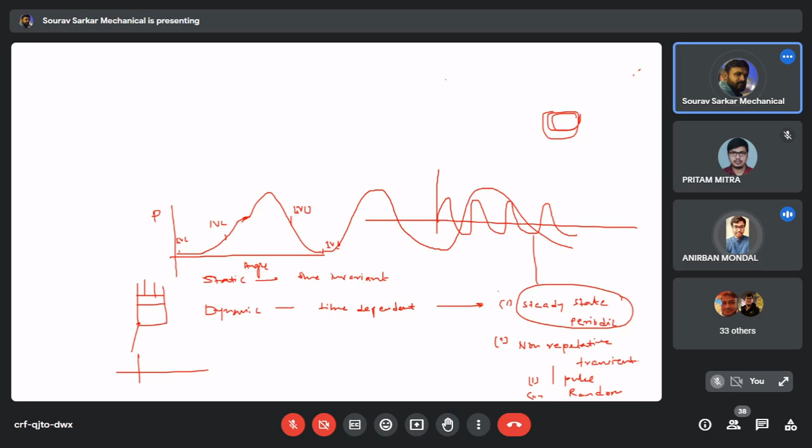Any doubt up to this point? If not, I am trying to say what is the main funda of dynamic characteristics. The main feature is that, if I give an example, suppose this is our environment, and this environment temperature is suppose 30 degrees Celsius.

Or maybe if you have done that thermocouple calibration experiment where the inside temperature was 370 degrees Celsius, and this is the gate or window through which you are inserting the thermocouple. Initially the thermocouple is at environment temperature 30 degrees Celsius. Whenever you are giving 370 degrees Celsius as the input signal, and whenever your system was at 30 degrees Celsius, it will take some time to reach this 370 degrees Celsius.

So what is this called? It can be called a time delay. What is the reason behind this time delay? The thermocouple is absorbing heat for some time, because temperature will rise due to absorbing heat, and only then can it attain this reset after some time. So gradually it will absorb heat, and it will take some time to attain that temperature, only then you can say it is basically taking this time.

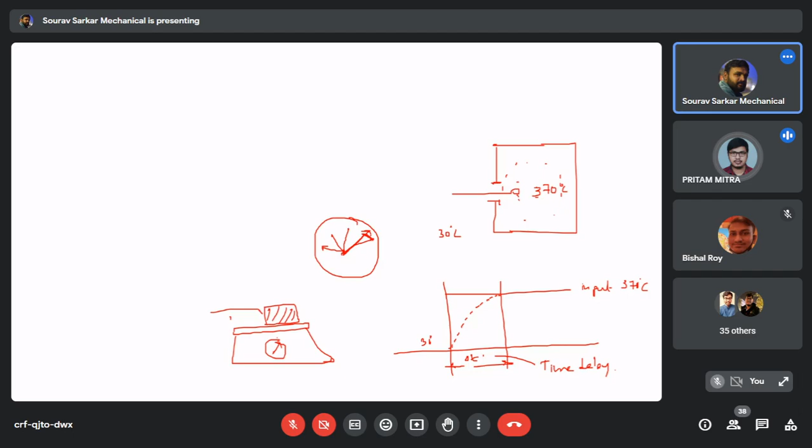Have you observed that? Yes, sir. Has anyone seen that? Yes, like this? You've seen this, right? Whenever you are applying the load, it oscillates here, there is a dancing, right, before coming back to the steady state, there is a dancing.

So if I try to plot the data - another important thing I want to mention is that whenever you are measuring any instrument, you have something called QI and something called QO. What is QI? Input, the measurement you need to measure. And what is Q out, QO?

That's a result. The parameter that's related to the measurement, the one being measured - exactly. QO is the parameter which is related to that measurement. So if your measurement changes, your QO will change, and you will get a calibration between QI and QO, and finally you will tell what is the exact value, right?

I want to say specifically, if there is a spring balance machine, your QI is actually the weight of the object, and that will cause an X naught. So your QI is basically the weight, and QO is equal to the displacement.

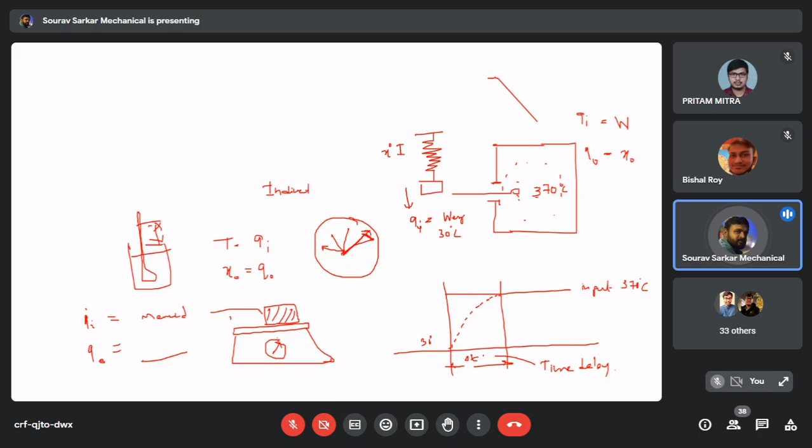So I am trying to say, if you see any measurement instrument, if it is an indirect type measurement system, there will always be an input which is QI, and there will be a Q out. So if I talk about temperature, the length is my Q out. If I talk about pressure, what is my Q output? The angle deflection - angle, theta. Yes, theta. So these are the outputs and these are the inputs.

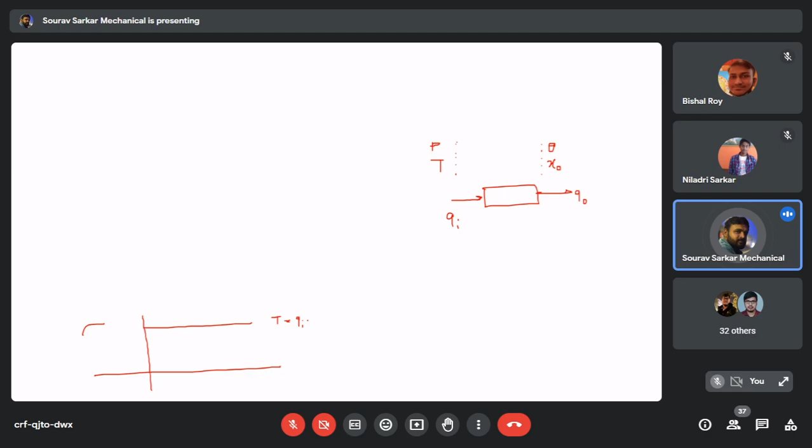Now what I'm trying to say is that if you give an input temperature which is QI, say 370 degrees, it doesn't mean that your output will suddenly attain this 370. So the behavior of input and behavior of output may not be exactly coincident, right?

If you have a weighing machine and you add a weight, this is the input - you are putting one weight over the weighing machine. Your system response will look like this. Do you accept this? Yes sir. So if you have a weighing machine, this is basically the QO and that is the QI. So my question is, why is this difference happening? What is the reason behind this difference? Why is your output not exactly behaving like your input?

So disturbance may be there. Disturbance - if there is no disturbance, maybe that's the same as attaining the steady state, attending the system. But I'm trying to say that you are getting this behavior, right? So my question is, who is responsible for this behavior?

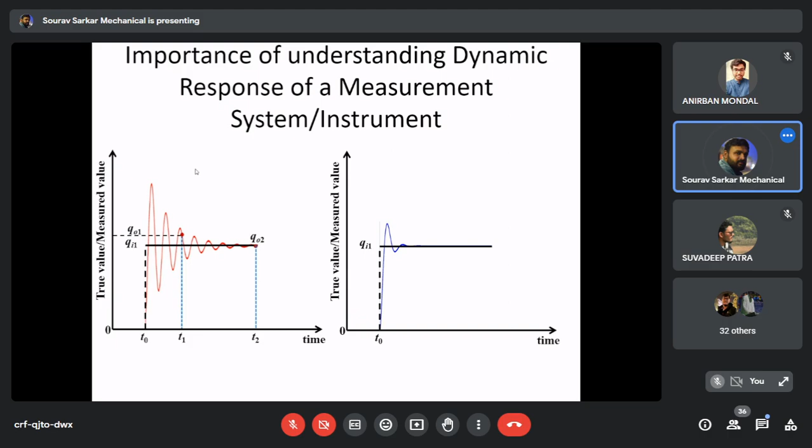Now it may happen that you have designed an instrument so that it quickly comes to the steady state value. So it is also important for your design, which component, if you think about this spring balance, what value I take for k, what value I take for the damping coefficient, so that my system behaves like the second system, so it can easily reach the steady state value.

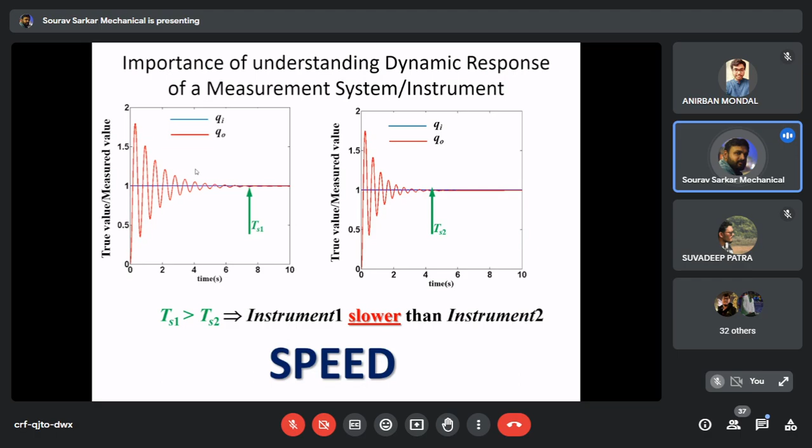So now I am a designer, thinking in the perspective of a designer, right? So this is qi and qo, and this is the settling time t, and the settling time can vary based on the system configuration. So I can say that instrument 1 is basically a slower instrument, and instrument 2 is a faster instrument. So I can also characterize speed from the instrument, how fast it can give me a true result.

Similarly, there can be a system. If you see curve 2, figure 2, the system never attains the value of the input even if you wait for an infinite time. So this is called the steady state error.

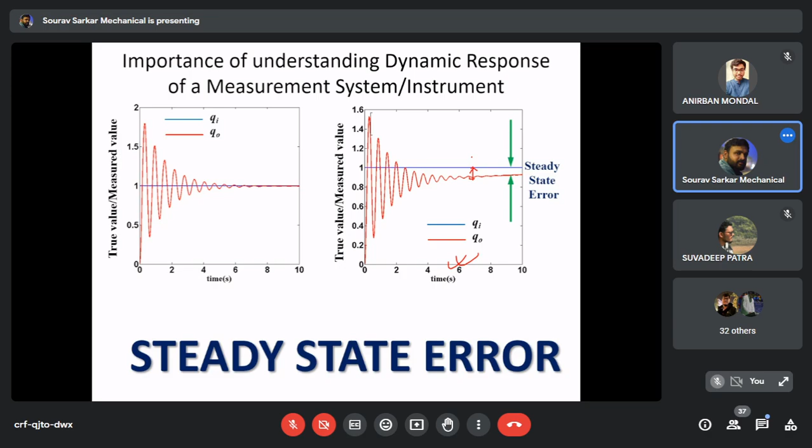So your system behavior will also decide whether there will be a steady state error or not. And this is the overshoot. So you have one instrument giving a behavior like this. But if you are tweaking the components and modifying the system, it can also give a behavior like this. This is more desirable than the other behavior.

So you have to understand why the system is behaving like this. What are the parameters that decide the system will behave like this? Or if I have the opportunity to tune the parameters, what are the parameters that need to be tuned so that the system behaves like this?

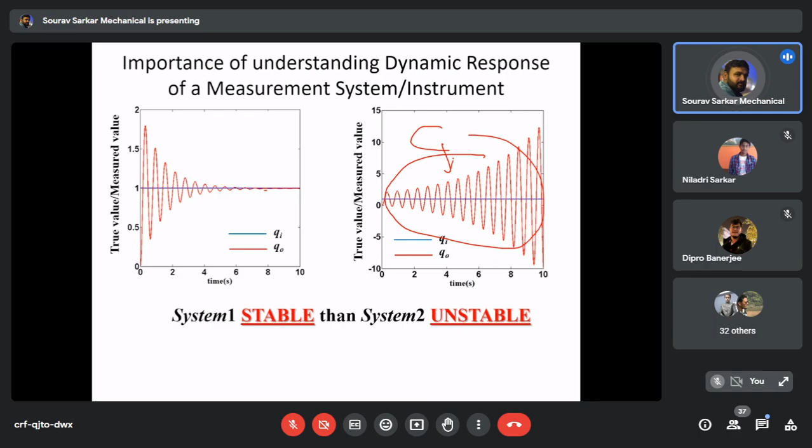Now to summarize and conclude the previous 10-15 minutes: we have to know the input and output relationship considering the specific need of the application. So we have to model it. I have to know the input and output mathematical equation. Then only can I see the behavior. And if I know the behavior, then only can I change the parameters and try to control the behavior. So the solution of the derived differential equation uses a standard procedure.

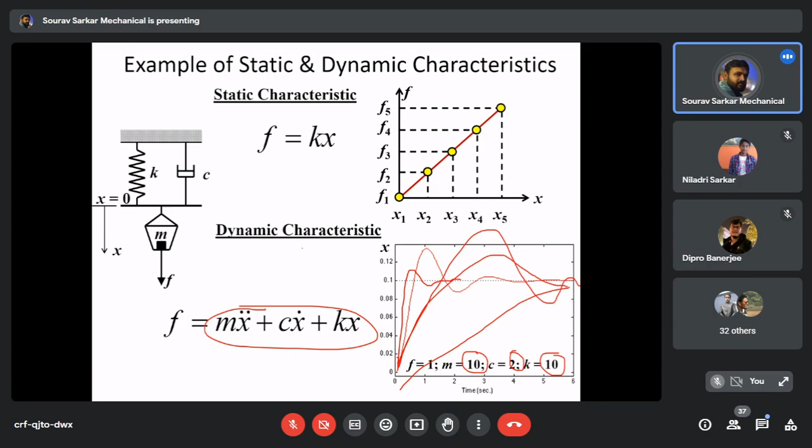So extraction of dynamic characteristic features from the time dependent relationship between input and output. Control the system parameters to achieve the desired dynamic features. Then use the dynamic characteristics in measurement to correct errors or filter improper data.

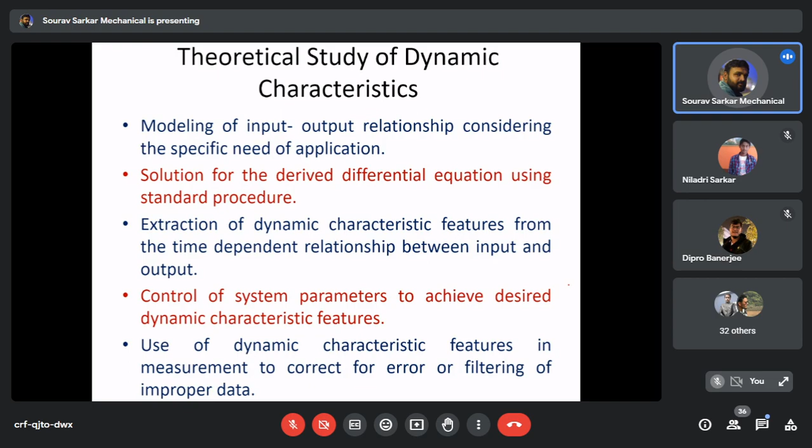So if I know the dynamic characteristic features, then I can take some measures, like please do not take a reading within 30 seconds. Like your doctor prescribes that if you are inserting your thermometer in your mouth or under the arm, they suggest you wait at least 30 seconds or maybe a minute, because the doctor knows the system behavior. So if you simply touch it, it will not give you the correct result because of the system behavior.

So already these things are known to you. I told you in the first class that in this whole course we are not going to learn something new. We are trying to collect concepts from different places, and based on that we are going to create a generalized perspective which is applicable everywhere. You have done almost 20-30 experiments in different labs, in different sessionals. Now you are trying to accumulate all those individual experimental ideas, and based on that you are developing a philosophy of experiment.

Hopefully you understood, right? Any doubt? Yes sir, so now I understand that there is a measurement system, and if you give one input, it will give you some output, and this is the input-output relationship, and it will look like this.

So we know that the behavior of any system generally follows a differential equation, and differential equations are things that we understood very little. Whenever I see a differential equation, my thermometer reading starts to go up, right? I'll try to make this very simple so you can easily understand that the dynamical behavior of a system can be expressed by an ordinary differential equation or maybe a partial differential equation.

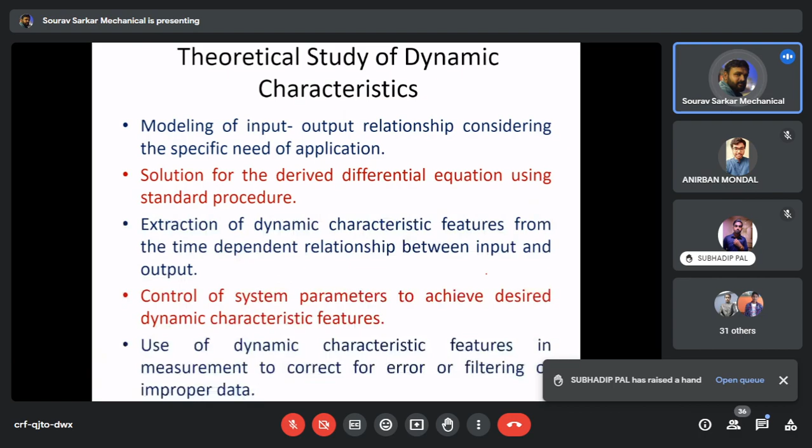তাহলে ফাইনালি কি দাঁড়াচ্ছে? আমার সিস্টেমের বিহেভিয়ারকে প্রেডিক্ট করতে হবে। এই সিস্টেমের বিহেভিয়ারকে প্রেডিক্ট করার জন্য ডিফারেনশিয়াল ইকুয়েশন দরকার। সেই ডিফারেনশিয়াল ইকুয়েশন অর্ডিনারি হতে পারে, পার্শিয়াল হতে পারে, কিন্তু আমাদের এই সাবজেক্টের scope only focuses on the ordinary differential equation।

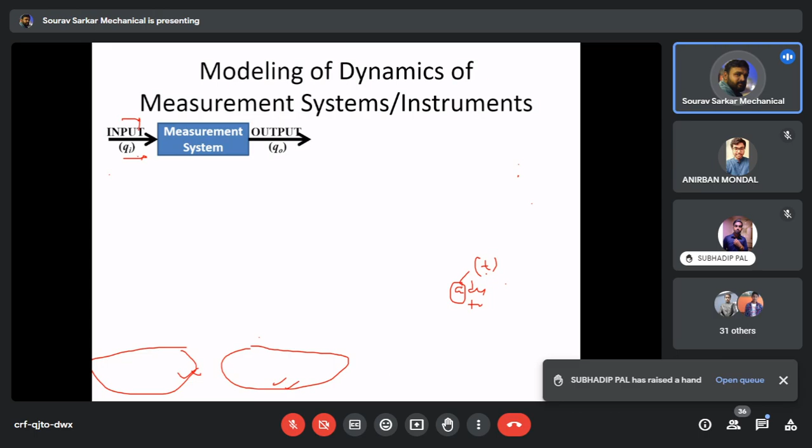But the ordinary differential is also a very big domain. There can be linear and non-linear. In our course, this UG3 mechanical measurement instrumentation UG level course, this only focuses on the linear ordinary differential equation. But linear ordinary differential is also a little bit a wide topic. We try to make it more simple for undergraduate students.

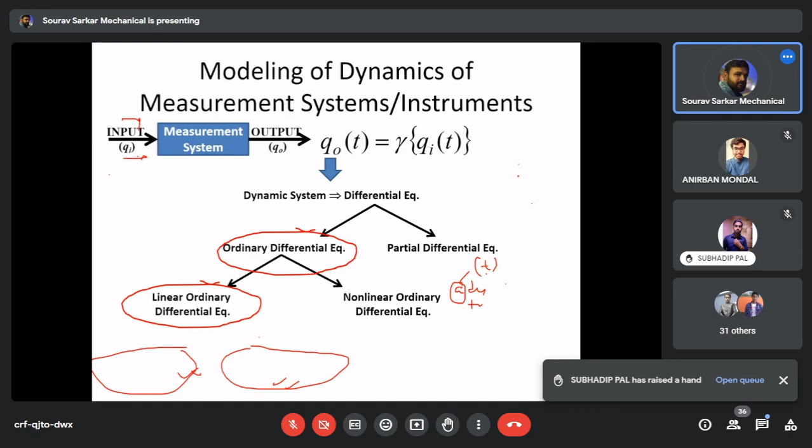We are only focusing on the linear time invariant ODEs, where the constants of the differential equation are not functions of the independent variable. So this is called linear time invariant ODE, so this is called LTI systems. So we will focus on the LTI systems. Any doubt up to this much?

Any doubt? কেউ কি আছে? No, sir. Yes, sir, ঠিক আছে। হ্যাঁ, আগের স্লাইডটা কি? শুনতে পাচ্ছি না, কি বলছে সেটা? কি বলছো? ঠিক আছে, পরে বলো। কথা কেটে যাচ্ছে কেন সবার?

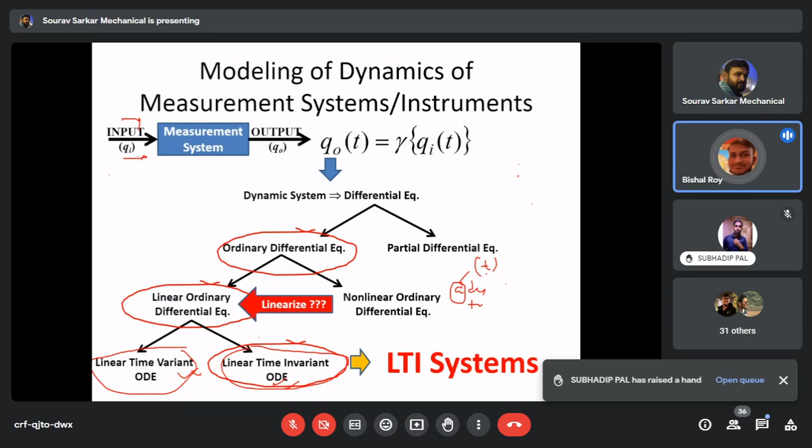না না, ওর নেটটা ঠিক নেই। শুভদীপের নেটটা প্রবলেম রয়েছে। হোয়াটসঅ্যাপ করো। হ্যাঁ, তাহলে I can express the relationship between input and output using a differential equation, and that differential equation will look like this।

কেমন বলছি? যেমন যদি এরকম হয়, d3qo dt³ প্লাস সাম a কনস্ট্যান্ট আছে, একটা a2 আছে, d2qo dt2 প্লাস সাম কনস্ট্যান্ট দিয়ে ইকুয়াল টু a function of qi। এ পাশটা হচ্ছে আমার ইনপুট আর এ পাশটা হচ্ছে আমার আউটপুট। এই আউটপুট এবং ইনপুট কিভাবে রিলেটেড সেইটাকে আমরা একটা ম্যাথমেটিক্যাল এক্সপ্রেশন দিয়ে রিলেট করার চেষ্টা করছি। ইজ ইট ওকে?

ইয়েস স্যার। তাহলে এই যে রিলেশনশিপ, এটাকে আমরা বলছি ai and bj, these are pure constants। এই পিওর কনস্ট্যান্ট বলে এটাকে আমি LTI বলতে পারছি, লিনিয়ার টাইম ইনভ্যারিয়েন্ট সিস্টেম।

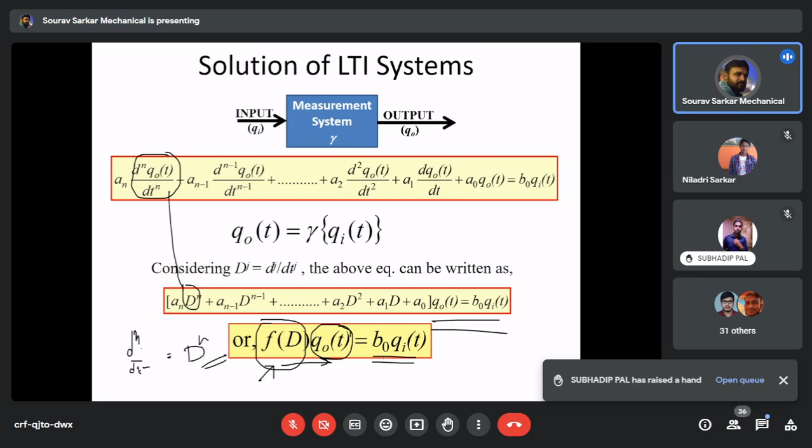So now your system equation will look like this. That means a differential operator is acting on the output so that it matches the behavior of the input. So this will contain all the information of time delay, overshoot, all those behaviors included there.

So if you see, if I try to find out the solution, how can I find out the solution? How do you find out the solution for d square minus 2d plus 3 operated on y equal to 3 sin t? How do you solve it? How do you solve this equation?

Sir, we would find out CF and PI - first make the right side zero, find the CF, then find the PI. Who said this? Niladri. Very good. Basically what you do, you try to find out the complementary solution - the first one you make it zero and you try to find out the complementary solution. And you have to also consider the right side and find out the particular integral. So once you know the complementary solution and the particular integral, you will get the complete behavior.

This complementary function is basically the system behavior, the system component - this is independent of the qi. You have to understand, very important, that your input is almost 0, actually 0, not almost 0. Still you are getting a response. So this is the inherent characteristic.

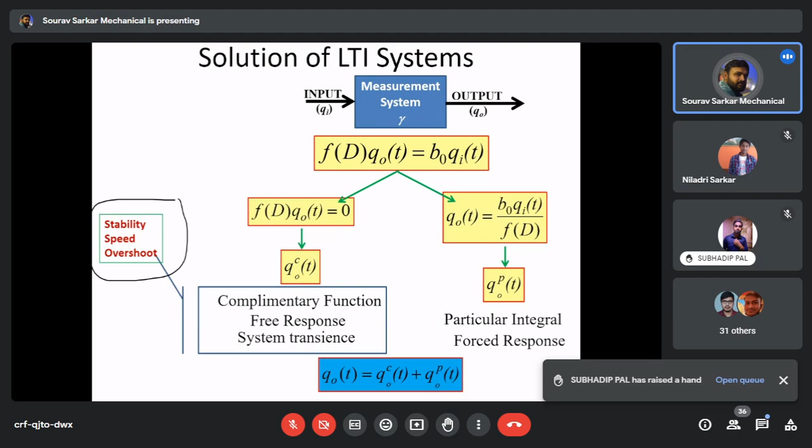Then over that you impose the forced solution - that is another thing. So that is why the behavior of the system can be obtained from the complementary function. The complementary function will give you all those stability, speed, overshoot - this is basically the phenomena you can get from those parameters. And also you'll get the forced response, and based on that you can find out other results.

So this is the solution, but we are not going to do it here - we don't do it here. So what we try to do is make life simple. So what we do is we are basically trying to solve this differential equation using Laplace transformation. Have you heard of this Laplace transformation?

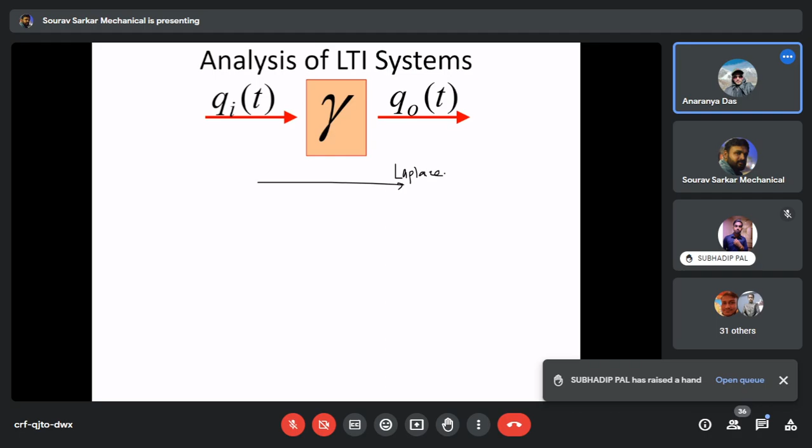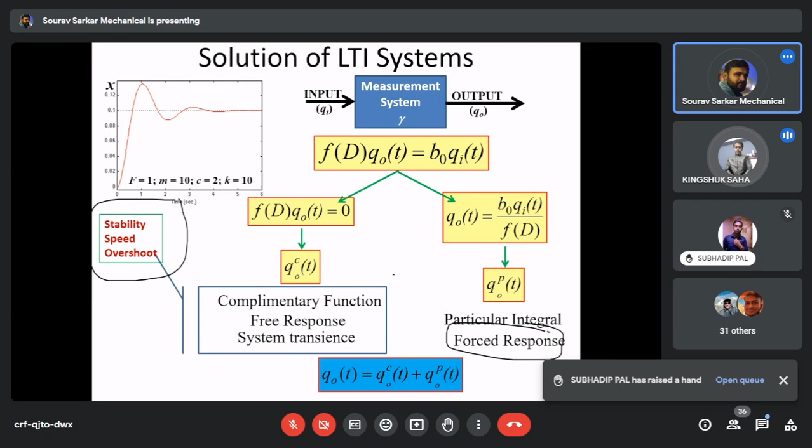তুমি ক্লাসে বসে আছো তো নাকি অন্য কোথাও বসে আছো? না স্যার, বাড়িতে বসে আছি। কোন জায়গাটা বুঝতে পারছো না? স্যার মাঝখানে ইকুয়েশনগুলো থেকে, আমরা তো ল্যাপ্লাস দিয়ে লিনিয়ার ডিফারেনশিয়াল অ্যালজেব্রাইক ইকুয়েশনে কনভার্ট করি, সেটা বুঝতে পারছি না। সেগুলো অনেক পরে আসে, তার আগে অনরণ্য কিছুই বুঝতে পারছে না, সেটা আগে অ্যাড্রেস করি।

অতটা পার্সোনাল হওয়ার দরকার নেই, আমরা একটু কন্টেন্টে ফিরে যাই।

তাহলে যেটা নিয়ে আলোচনা করছিলাম, so what we are discussing is that if you think about any system, the system will receive input and it will give you output, and what you measure is basically the output. এখন সিস্টেমের অ্যাকচুয়াল মেজারমেন্ট যদি টাইমের সঙ্গে ভ্যারি করে, আমি আউটপুটে সেম রেসপন্স পাবো না।

এই রেসপন্সটা ভ্যারি করতে পারে, তার কারণ সিস্টেমটা কি কি কম্পোনেন্ট দিয়ে তৈরি, আর সেটা ডিপেন্ড করছে সিস্টেমের গভর্নিং ইকুয়েশন কি। যদি একটা পেন্ডুলাম সিস্টেম হয়, একটা পেন্ডুলাম এদিক ওদিক যাচ্ছে, তাহলে এই পেন্ডুলামের একটা গভর্নিং ইকুয়েশন আছে, আমরা জানি সাম m ইন্টু mx ডবল ডট প্লাস সামথিং gx ইকুয়াল টু 0, সামথিং লাইক দিস। এই যে সিস্টেমটা ফোর্সটা রিসিভ করছে এবং তাকে ডিসপ্লেসমেন্টে কনভার্ট করছে, তার গভর্নিং ইকুয়েশনটা যদি আমি জানতে পারি, তাহলে আমার কেল্লাফতে হবে, এটাই ফার্স্ট থিং।

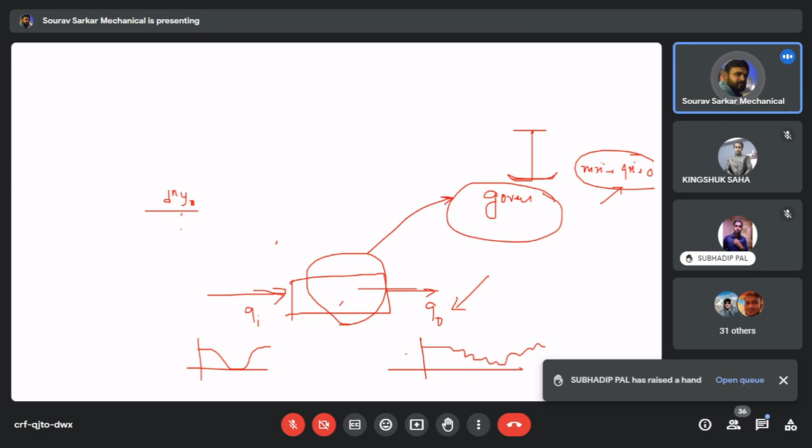নেক্সট, এই গভর্নিং ইকুয়েশন কেমন দেখতে হবে, সেটা বাই নেচার ডিফারেন্সিয়াল ইকুয়েশন। আমি লিখছি মোস্ট জেনারেল ফর্ম অফ ডিফারেন্সিয়াল ইকুয়েশন। তাহলে এখানে আমার nth অর্ডার ডেরিভেটিভ আছে। স্যার n কেন নিলেন, এত কঠিন করছেন কেন? যখন প্রবলেমগুলো সলভ করতে যাব তখন n এর ভ্যালু হবে ম্যাক্সিমাম 2, কিন্তু আমি এটাকে যতটা জেনারিক করা যায় সেভাবে লিখছি। তোমার যদি মনে হয় n দেখলে ভয় লাগে, তুমি n টাকে মনে করো 3।

যে n ইমাজিন করতে পারে সে n টাকে মনে করছে 500। এই অ্যাবস্ট্রাকশনই আমাদেরকে ইন্টেলিজেন্ট করে তোলে। যে যত বেশি অ্যাবস্ট্রাক্ট করতে পারে সে তত বেশি ইন্টেলিজেন্ট হয়। তাহলে আমরা এই অ্যাবস্ট্রাকশন করছি যে আমার ডেরিভেটিভটা nth অর্ডারের হতে পারে, সেইটার উপর ভিত্তি করে আমার ফাংশনটা এখানে qi আছে।

তাহলে আমার একটা ইনপুট আছে, তার ভিত্তিতে সিস্টেমটা রেসপন্ড করছে এরকম করে। একটা এক্সাম্পল দিয়ে বলি, আমার একটা mass ইন্টু x ডবল ডট প্লাস cx dot প্লাস kx is equal to f sin omega t. It is a system equation, and this equation and this equation are simply same, only here n equal to 2, and an equal to m, an minus 1 equal to c, an minus 2 equal to k।

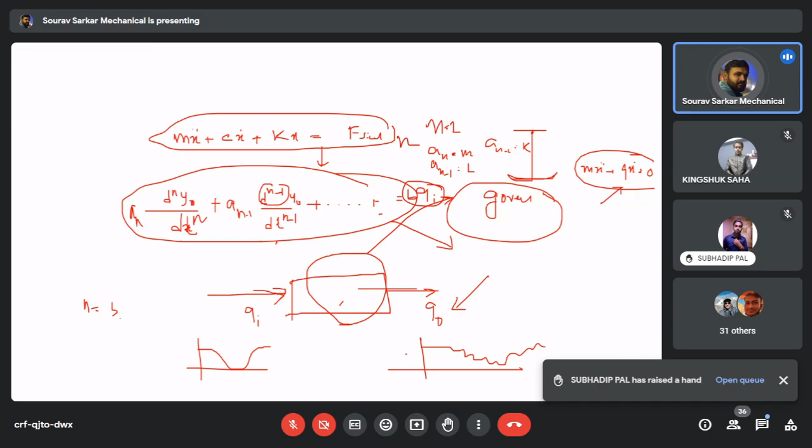বোঝা যাচ্ছে? তাহলে এইটা হচ্ছে আমার সিস্টেম ইকুয়েশন। এবার এই সিস্টেম ইকুয়েশনটাকে যদি আমি সলভ না করি, তাহলে আমি অ্যাকচুয়ালি ক্যান্ট গেট দ্য সিস্টেম বিহেভিয়ার। তাহলে আমি ইনপুট আর আউটপুট এই দুটোর মধ্যে একটা সিস্টেম ইকুয়েশনকে বার করার চেষ্টা করছি।

এবার পরের প্রশ্ন হচ্ছে, আমার একটা সিস্টেম ইনপুট, it can behave if it is the value of qi, and if it is time it can behave like this. এরকম বিহেভ করতে পারে। এই সিস্টেমটা এর থেকে একটু ডিফারেন্ট ভাবে এরকমও বিহেভ করতে পারে। এটাও আমার একটা পিরিয়ডিক ফাংশন। তাহলে একটা সিস্টেম টাইমের সঙ্গে সঙ্গে it can behave in different ways।

Now these are all called time domain information. এই টাইম ডোমেন ইনফরমেশনটাকে I can convert into frequency domain information. How? I can write down the amplitude and frequency। তাহলে এইটাকে আমি যদি ফ্রিকোয়েন্সি ডোমেনে কনভার্ট করি, এই ইনফরমেশনটা কেমন দেখতে হবে?

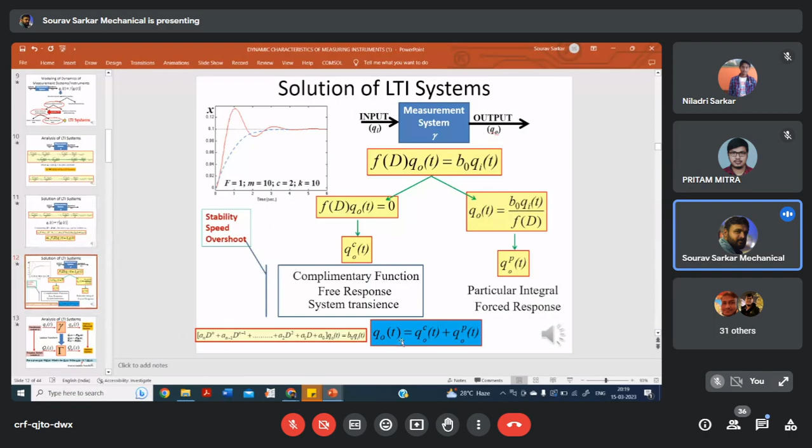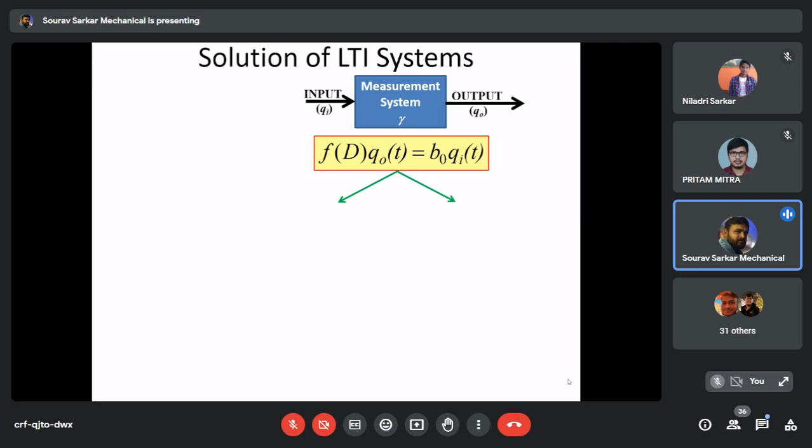নীলাদ্রি যেমন বলছিল, we are basically finding out the complementary function and particular integral, and if we take a sum of this I can find out the answer. But there is an easier way to solve this problem, and this is basically called the Laplace transformation.

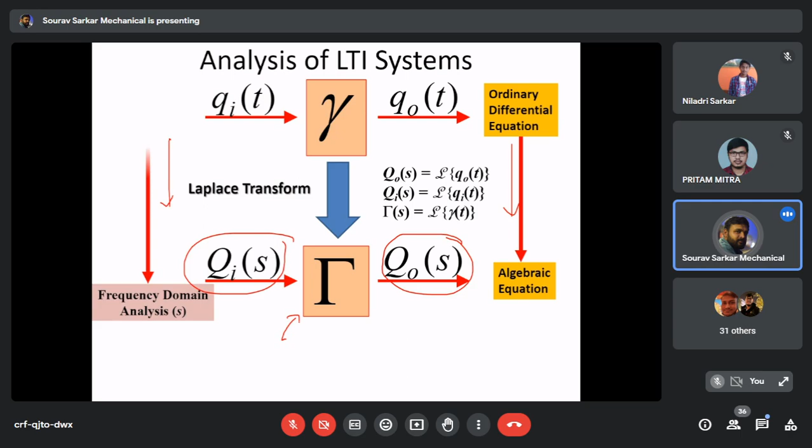So your ordinary differential equation will convert into an algebraic equation, যেটা Kingshuk বলার চেষ্টা করছিল। সো এই যে আমি টাইম ডোমেন থেকে ফ্রিকোয়েন্সি ডোমেনে চলে আসবো, এসে আমরা এই অ্যালজেব্রিক ইকুয়েশনে কনভার্ট করব, তারপর ল্যাপলাস ট্রান্সফর্ম বার করে তার ভ্যালু বার করব, তারপর ইনভার্স ল্যাপলাস ট্রান্সফর্ম করে ফাইনাল অ্যান্সারটা বার করব। সো জিনিসটা কমপ্লিকেটেড মনে হলে একটু রিভাইজ করতে হবে।

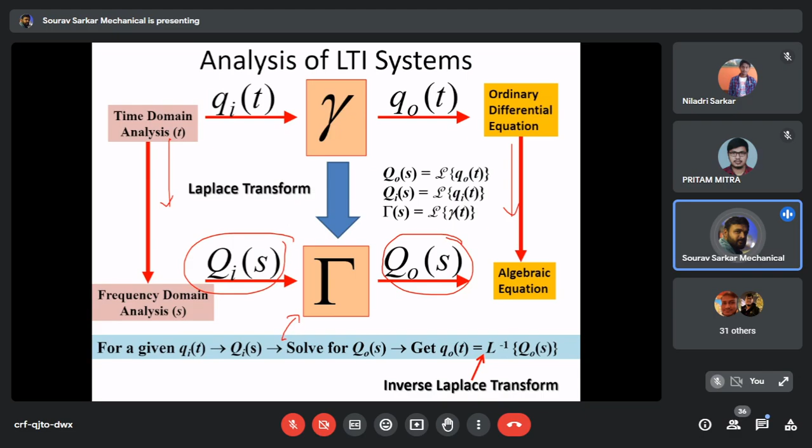So what is Laplace transformation? If you know the function f(t), if you integrate between 0 to infinity, f(t) multiplied with a parameter e to the power minus st, dt, then whatever you get is basically called F(s).

I can easily convert this into an algebraic equation. Then I will find out the answer. Then I will go for Laplace inverse transformation to find out the actual function. I will show you some examples, then it will be easier for you to understand. So once you know the value of Laplace, if you do a Laplace inverse transformation, then we can find out the actual functional dependence.

These are information, if you feel it is difficult, just ignore at this point of time. So now you don't need to perform this integration. Some jobless people have already done this hard work, and they have performed this integration, and they have prepared a table that you can make a small note and keep in the back of your calculator or in your pocket, so that you can open it up and note down that cheat whenever you need. So for your benefit, people have discovered these principles and created a table, and in that table they have performed this integration and found out this Laplace transformation.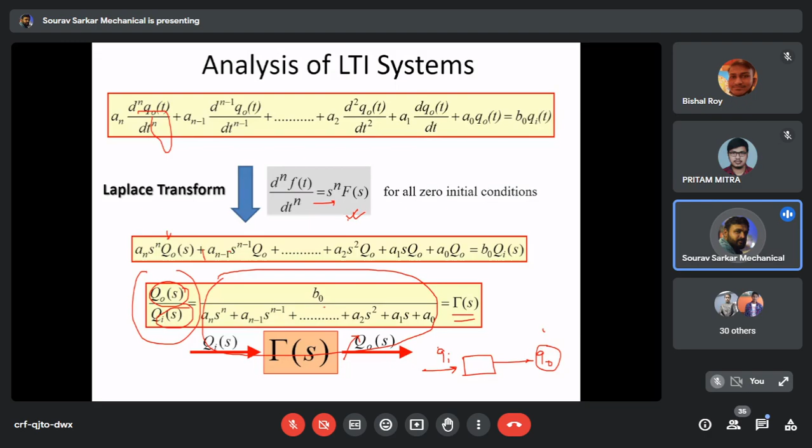Now the stability of the system will depend upon the root of these equations. So it is called the system transfer function, and the root of this transfer function is basically called the poles of the system.

If any of the poles - I told you that this need not be real, right? If you go back here, s was basically a component with a real part and an imaginary part, right? So if I try to find the root of this transfer function's denominator, it can be real or it can be complex conjugates.

So it can be either real or complex conjugate. If the real value is less than 0, you can call the system stable. If the complex part has two parts, A plus iB, and the real part is less than 0, you can still call the system stable. But once your real part is greater than 0, your solution becomes unstable.

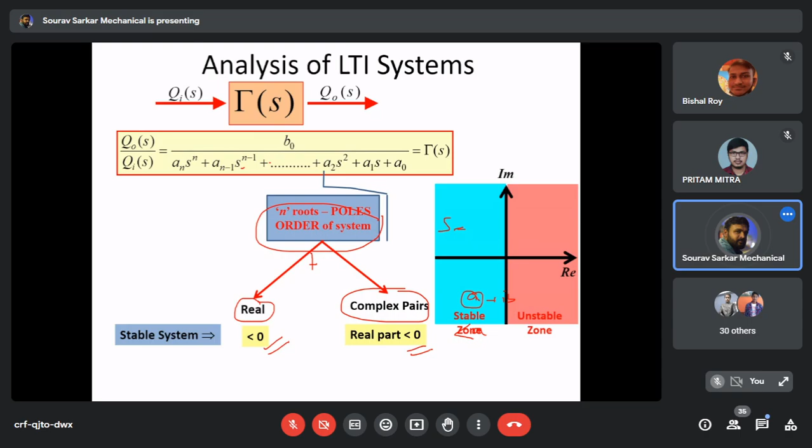This is basically called the Argand diagram. If you go back to your class 12 de Moivre's theorem and complex algebra - I'm not going into complex calculus - you can see there, this is the Argand plane. If your real value is greater than 0, the system becomes unstable, and if your real value is less than 0, the system becomes stable.

If I try to understand it in my own way, you basically write down something like e to the power minus st, right? e to the power st is kind of your solution, right?

So now if you see this s value starts with a negative value, that means as you move forward in time, this value gradually diminishes to 0. And if your value is positive, as you move forward in time, this value will exponentially grow. So there is a chance of what?

Instability, right? So that is why, understand that if it is less than 0, since you have an exponential function, as it is less than 0, eventually the value of e will die down.

If the real component is greater than 0, gradually it will go up, and if it is going up, it will become an unstable system. So by this way, we can find out if the system is stable.

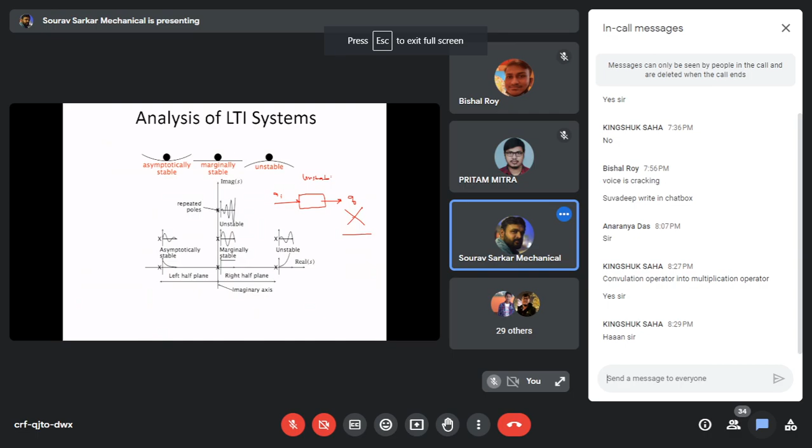So by this way we can actually find out the solution of the system. What do you mean by solution of the system? It means if I give a known input, and if the solution is unstable, the system will give me a completely useless solution. Whenever the system becomes unstable, it gives unbounded, noisy, chaotic solutions.

But if your system is stable, it will try to give me a deterministic solution. That means if I give input of 10, a force of 10 Newton, it will give me some 2 millimeter output, and every time it will give me 2 millimeter. So it is giving you a stable solution.

But if the roots of that polynomial give an unstable feature, the value will be unbounded, and after some time this value will increase and completely explode. So this is not desirable. You have to tune the parameters of that differential equation in such a manner so that the system behaves in a stable manner.

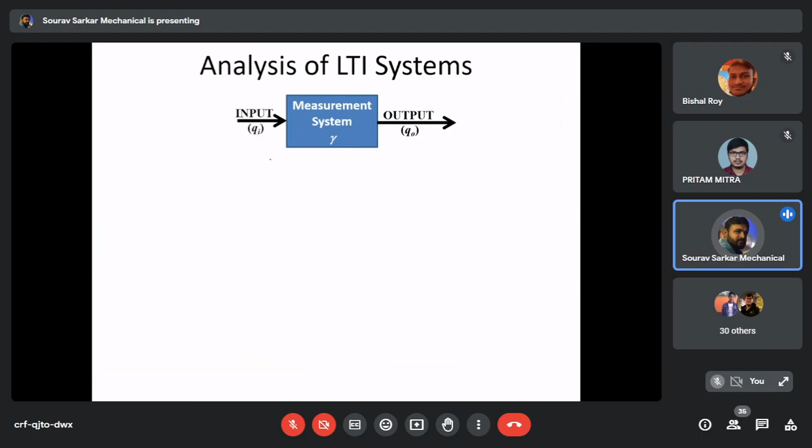What is the outcome of this whole information? I will get my transfer function, and if I see the transfer function giving me some positive real root, I have to adjust those constants in such a way that the system behavior is adjusted so that it can behave as a stable solution. So this is the designer's perspective, that my system should not behave in an unstable manner.

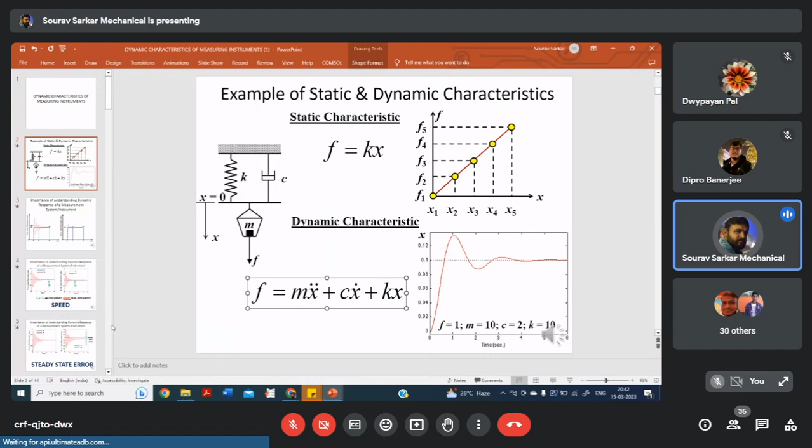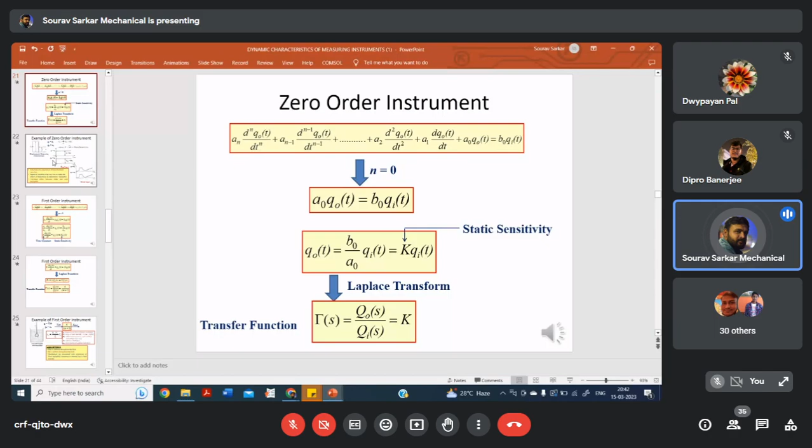ঠিক আছে, এই অবধি আমরা দেখি, নেক্সট উইকে বাকিটা দেখব। নেক্সট উইকে আমরা যেটা করব সেটা হচ্ছে, এই সিস্টেমে n এর ভ্যালু বসাবো - n এর ভ্যালুকে 0, 1, 2 বসাবো, এই n = 0 লেখা রয়েছে, দেখতে পাচ্ছ?

এর উপর ভিত্তি করে আমরা ইনস্ট্রুমেন্টকে জিরো অর্ডার, ফার্স্ট অর্ডার এবং সেকেন্ড অর্ডার, এই তিন ভাগে ভাগ করব, আর সেখান থেকে সিস্টেম বিহেভিয়ার দেখব। শুভদীপ যেটা বলল যে স্প্রিং থাকলেই ঝামেলা হয়ে যাচ্ছে, মানে ওভারশুটের কেসটা স্প্রিং থাকলেই হচ্ছে।

But thermocouple এ overshoot হচ্ছে না, because thermocouple is basically a first order system, and spring it is basically a second order system. So based on the differential equation you will actually see why we are getting some different phenomena like overshoot, settling time, rise time - keno amra pacchi, then we will understand.

Amra ekhon er por theke ar n use korbo na, we try to make it specific - either n equal to 0, I will describe what is the behavior of zero order instrument, then first order instrument which is a thermocouple, then second order instrument which is basically a pressure gauge or maybe a weighing machine.

So this is basically the behavior. If we understand the behavior, then we will understand what are the parameters that govern this behavior, and then we will tune those parameters. আমি স্প্রিং এর স্টিফনেস চেঞ্জ করে দেবো, ড্যাম্পিংটাকে বাড়িয়ে দেবো, এগুলোকে চেঞ্জ করে how I can eradicate those undesired dynamic behavior. So my objective of the whole course is to design an instrument which will not have these undesired dynamic characteristics.

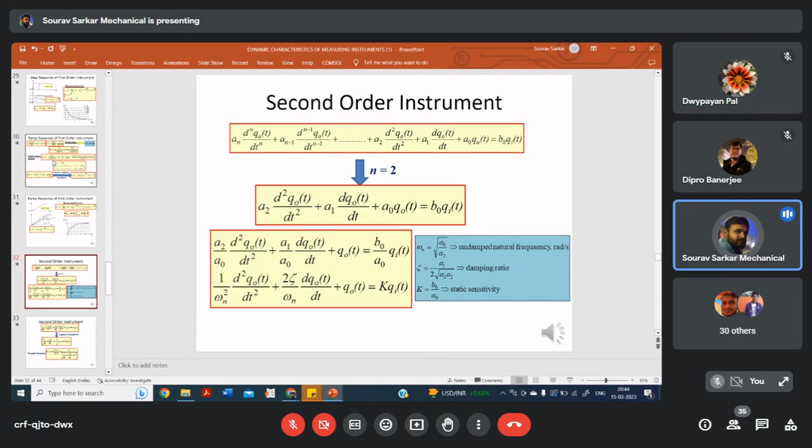So this is the - pardon. Hello. কে বলছে, কি বলছে?

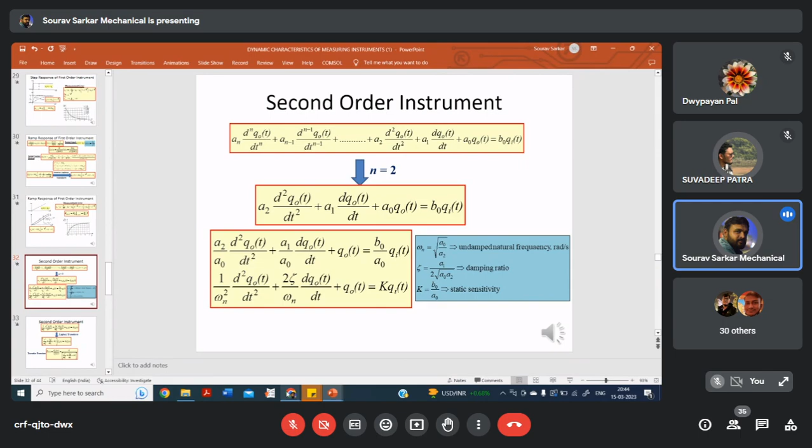তাহলে এই অবধি থাকলো, আমি স্লাইডটা শেয়ার করে দিচ্ছি। সেটা দেখো, then we can discuss in the coming class.

পরীক্ষাটা আজকে হচ্ছে না সামনের দিন হচ্ছে?